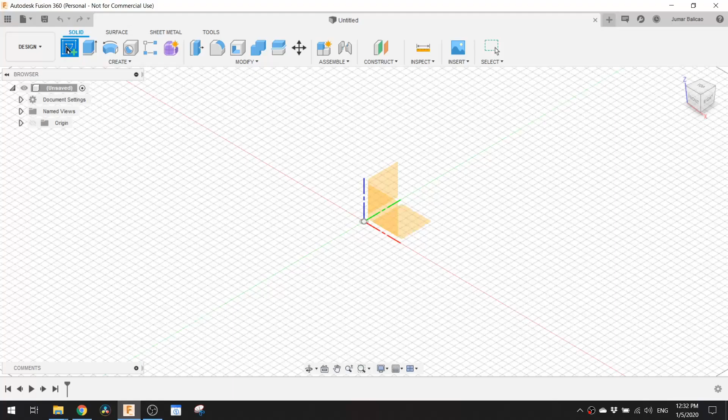I've got a request for a project from a friend, and this is the LED light that he used to light up his aquarium. But now he wanted to use it as a light in front of his new desktop monitor. And to help a friend, this is the video that we will be doing today.

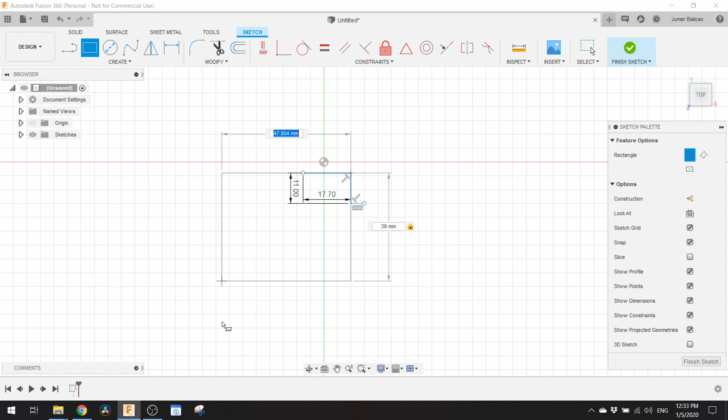As always, we will sketch all first, and you can just follow along on what I'm doing here. Basically, this is a bracket that will hold the LED light that you have seen a while ago. And this will have two parts. One part is to be attached to the monitor by double-sided tape at the back, and the other one is to be clipped in the LED light.

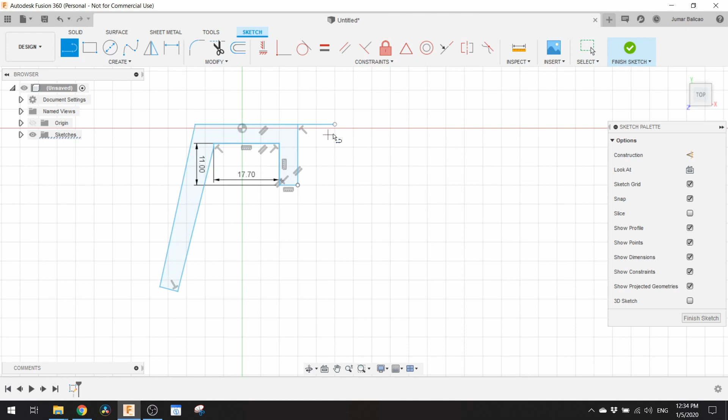This first sketch I'm doing here is the part which is the one to be attached with double-sided tape to the monitor. And the first part of sketching is done, and we just need to extrude this at about 30 millimeters.

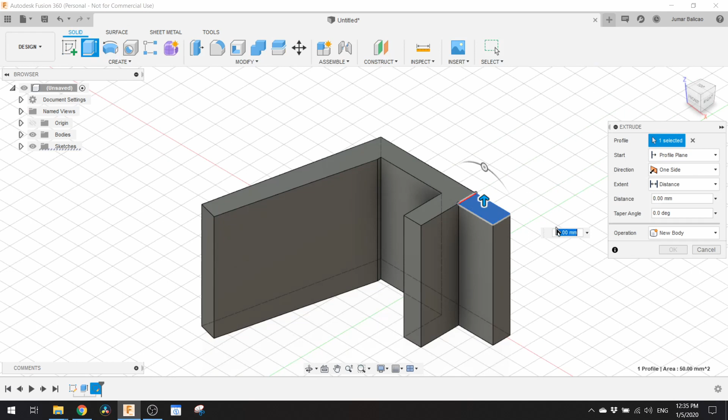And after that, we need to sketch on top again to lessen the materials on this part of this model. This part will be used to attach the screw later on. We will lessen this at about 20 millimeters. And then we need to extrude this part at about 5 millimeters.

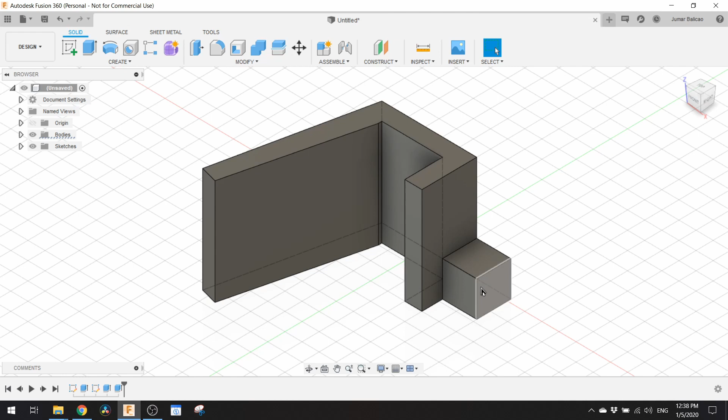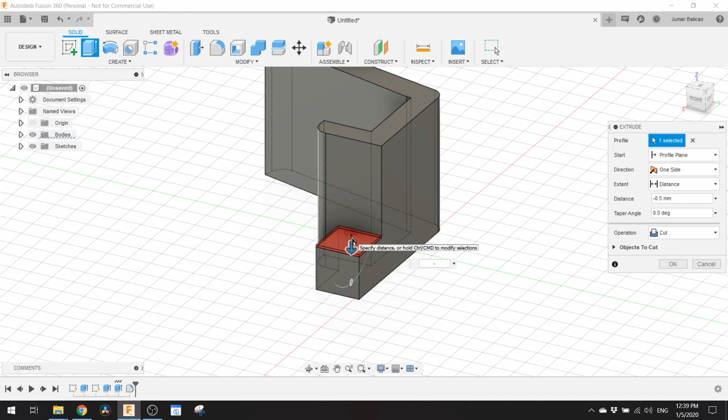Then after this, we need to fillet around some of the corners because I don't like some of my designs to have cornered edges. And then I think this part is too thick, so we need to lessen this to 5 millimeters. Then round the edges to 5 millimeters also.

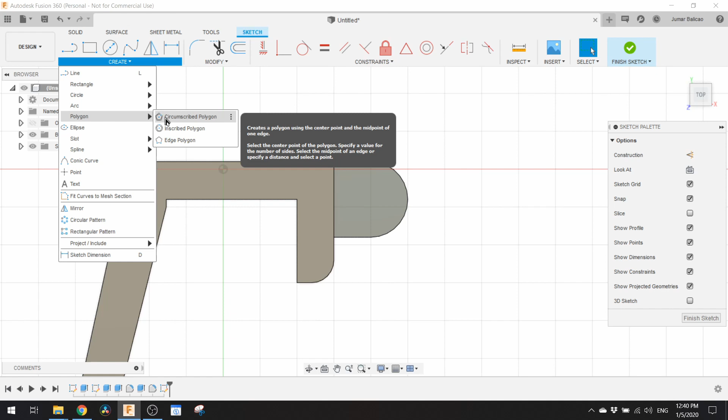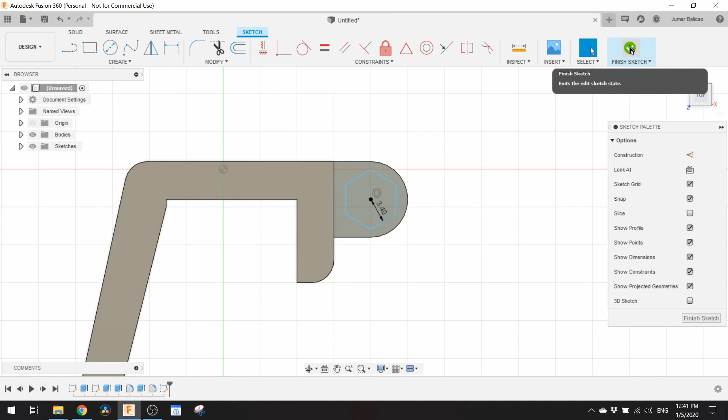Then the next thing that we need to sketch is a polygon or a hexagon for the nut to go in later on. The size of the nut is 3.2, but we will put it at 3.4 because you know some filaments tend to expand. And then I think we need to elongate this part a bit, and that's it.

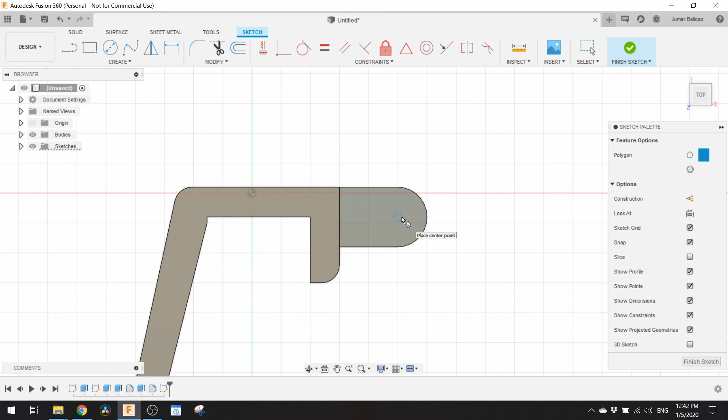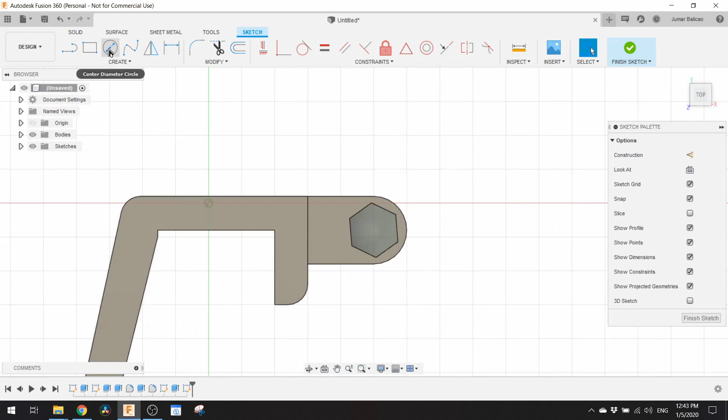And I think 3.4 is a little bit small, so I will change this to 3.5. And then I will extrude this to -3. Then we will make a hole at the center of it. This is for the bolt later on. The size of the bolt is 4 millimeters, but we will make an allowance, so I make this 4.2 millimeters. Then we just need to extrude this out to make a hole.

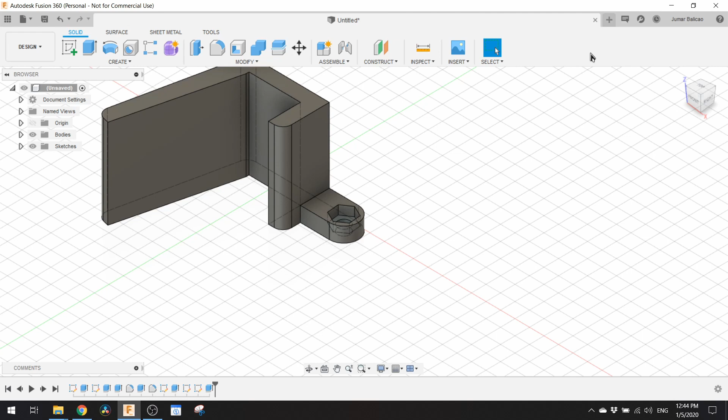So the first part is done, and the next thing that we need to do is to do the part that clips on the LED light.

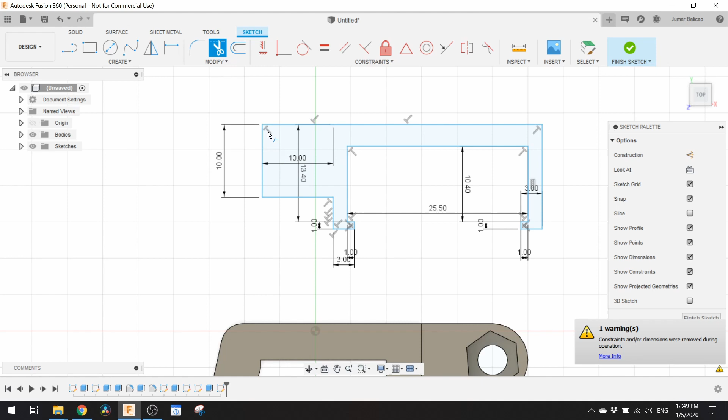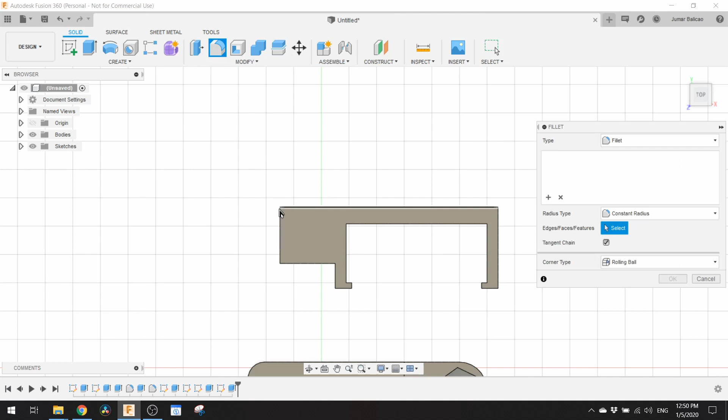So the sketch of the second part is done, and the next thing that we need to do is to extrude this at about, I think, 5 mm. Then we need to round these two edges at around 5 mm also.

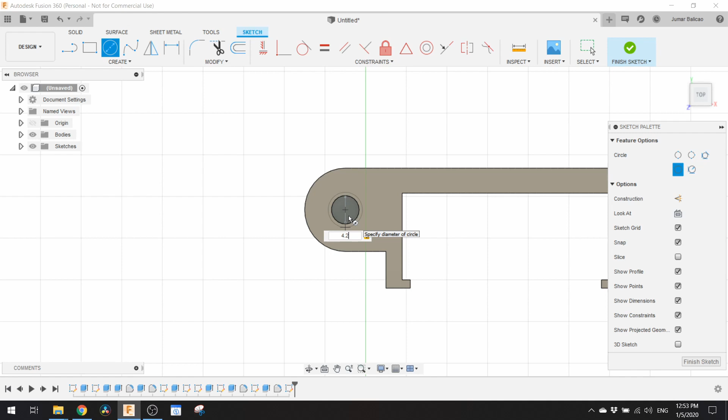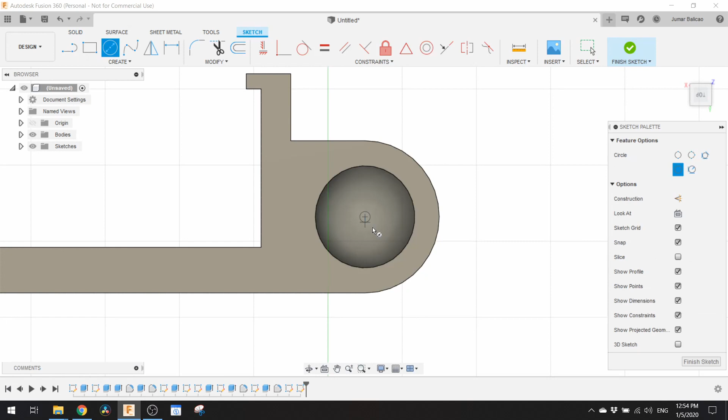I made a mistake on this part, so I need to change the diameter of this hole from 3.4 to 6.7, and then the other circle to 4.2, and then we need to extrude it out. It should be the same size as the hole on the other side.

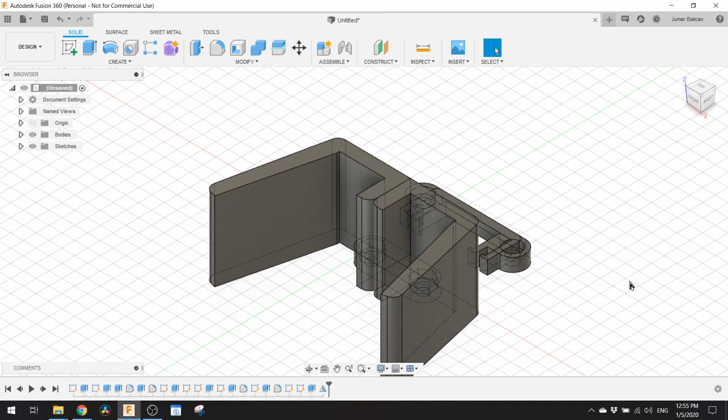Then the next thing that is left for us to do is to mirror this model, because we need 4 parts of this. One part is one set and the other part is the second set, for both sides of the LED light.

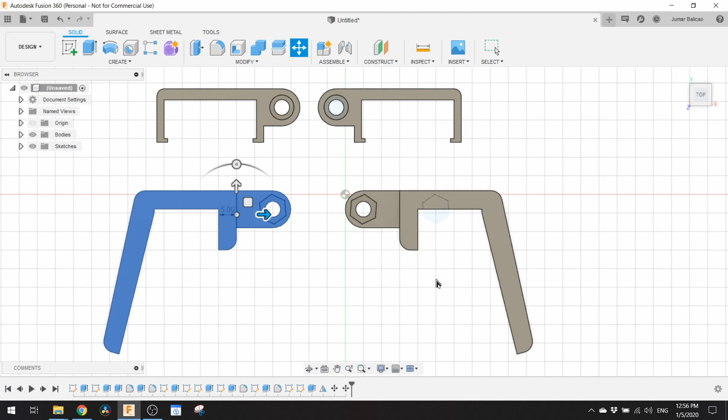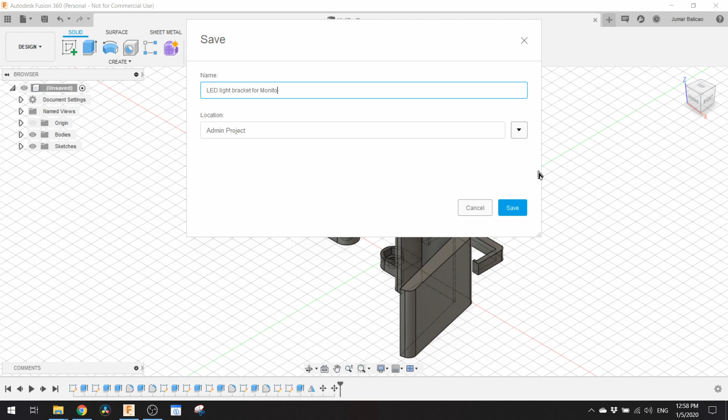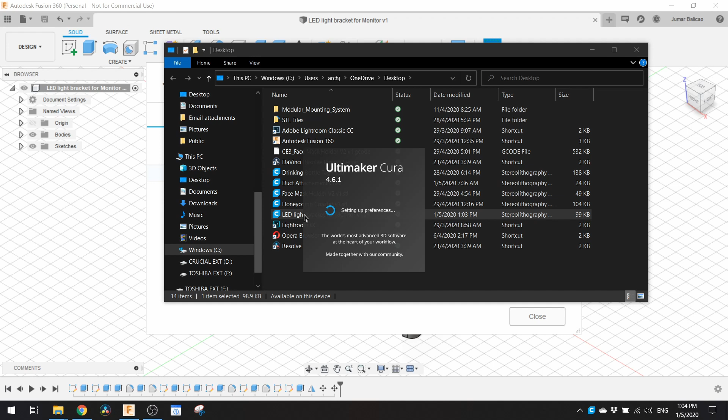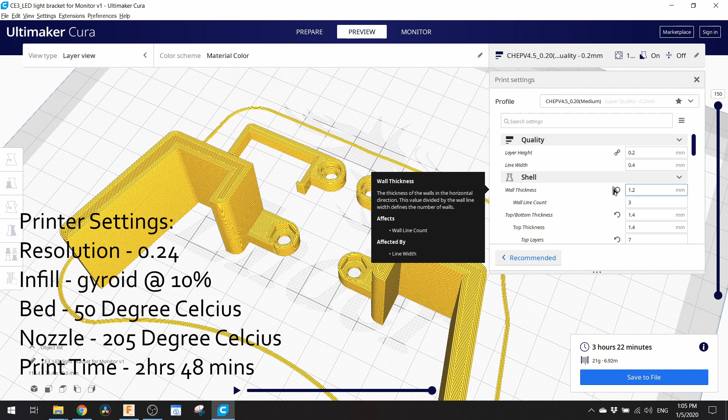And our model is done, and what's left to do is to save this and export this as an STL file for us to prepare in Cura for the printing later on. The print settings that I have done are listed here, so you can just see it through. And our Cura settings are done, and let's roll the time lapse.

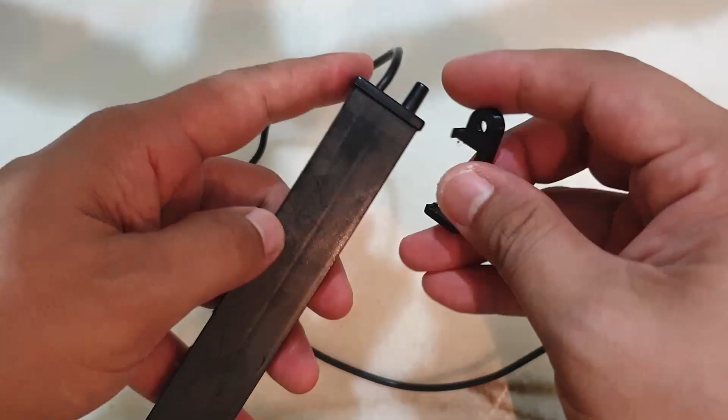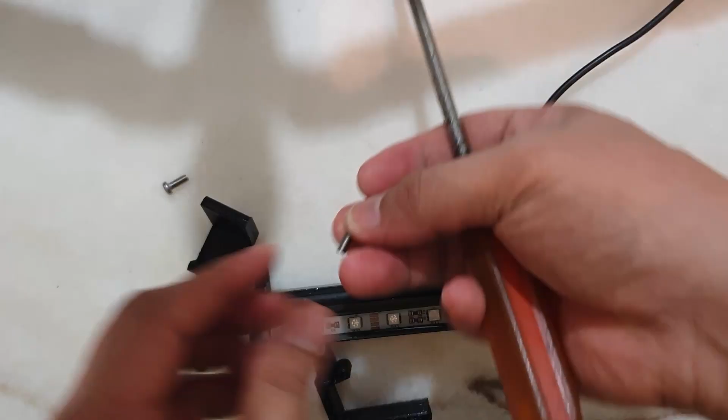And the assembly of this is pretty straightforward. You just need to clip in those 2 clips on the side of the LED light, and then put on the bolt and nuts on the other side, and you just need to screw it all in and tighten a bit, and then you need to put double-sided tape on the part that you will install on the monitor.

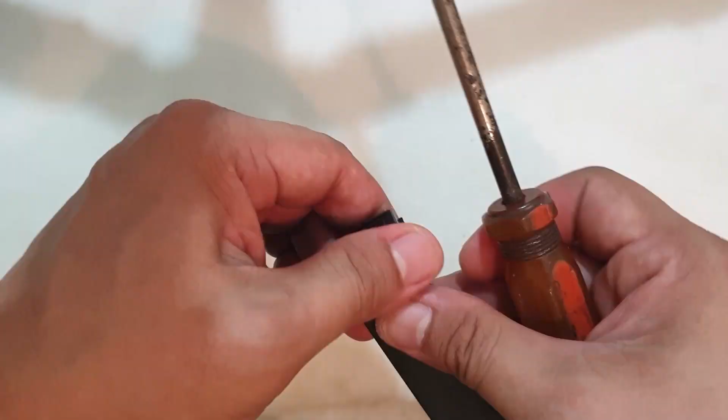And once the assembly is done, all that's left to do is to install this.